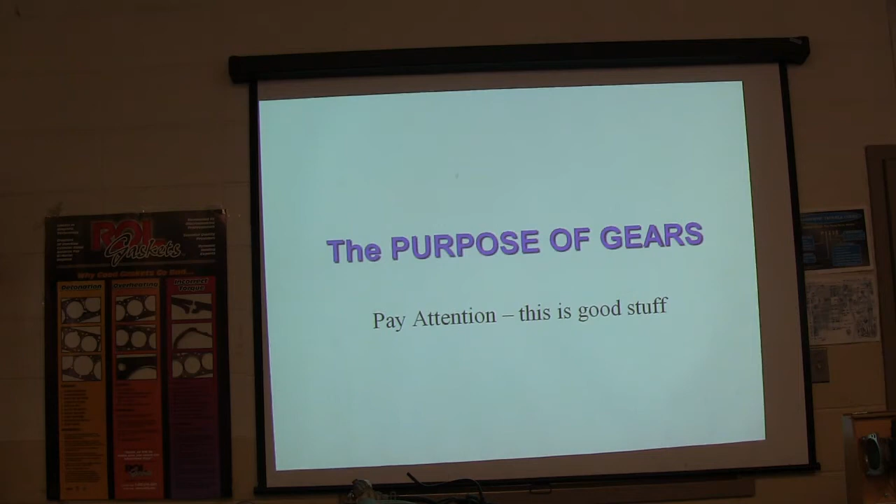This is manual transmission day, an elementary study on gears and whatnot. So you either know some of this stuff already, or you don't know much of it. But what we're going to do is show you about the purpose of gears. Now pay attention, this is good stuff.

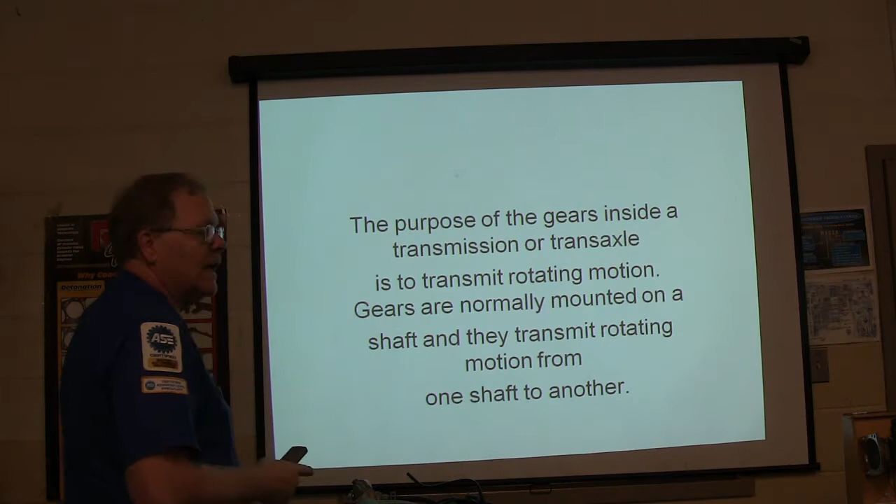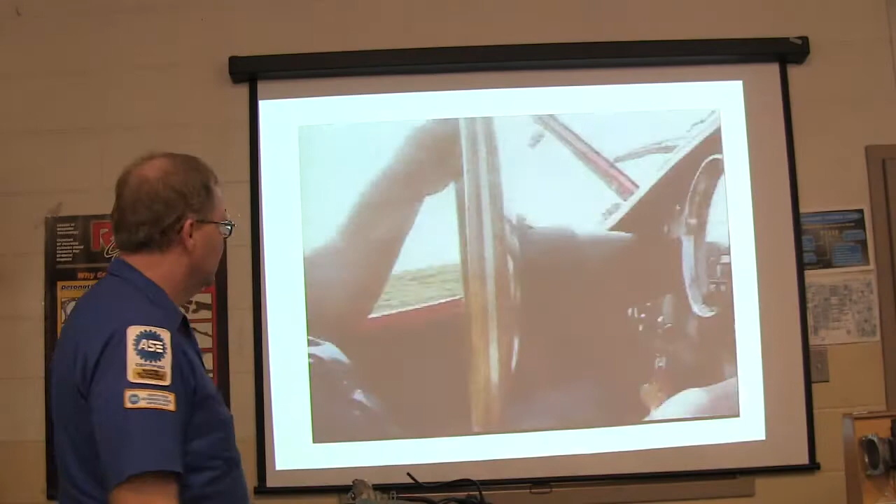This is me driving a Cobra. Believe it or not, by the time I got shifted through to third gear on that thing, I was just driving it like I would any other car. Donnie was riding with me. He goes, 'Did you know you're going over 100 miles an hour?' And I said, 'Good grief.' I didn't have any idea that thing was that overpowered.

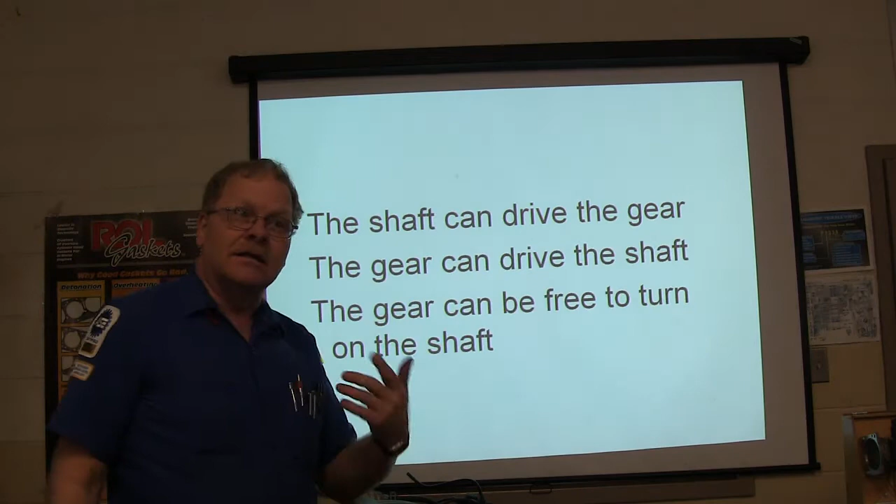The shaft can drive the gear. The gear can drive the shaft. The gear can be free to turn on the shaft. This is how these transmissions work.

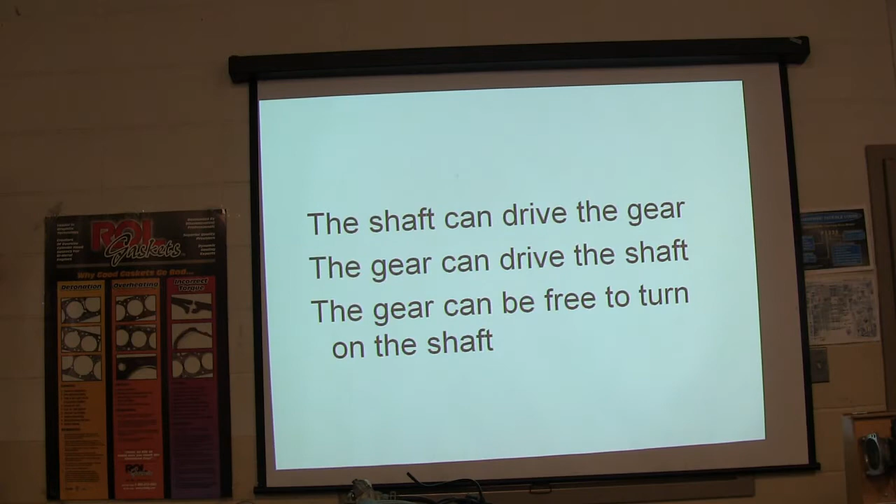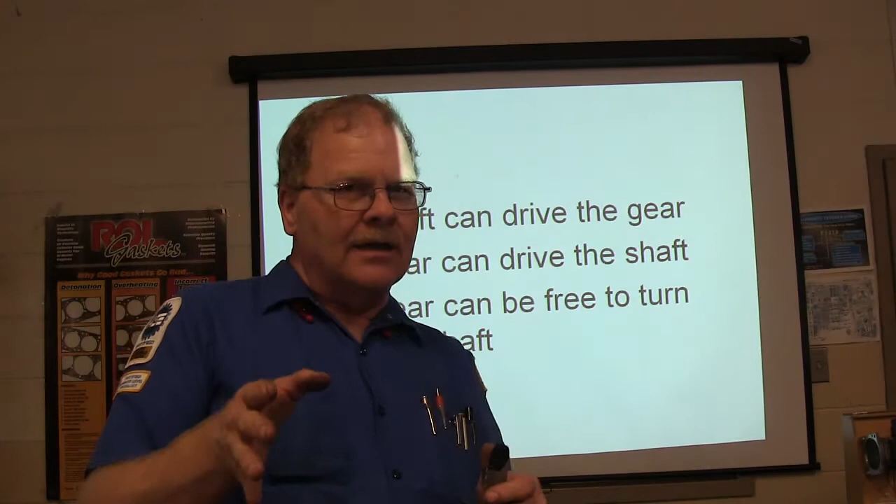Now I got one over here that you guys are going to need to know. See that one over there? We can set it up and actually show you guys how all this stuff works. Ultimately you're going to need to know that, and we don't need anybody struggling at the end of manual transmission to figure out how the power flow works. The sets of gears can be used to multiply torque and decrease speed, or increase speed and decrease torque.

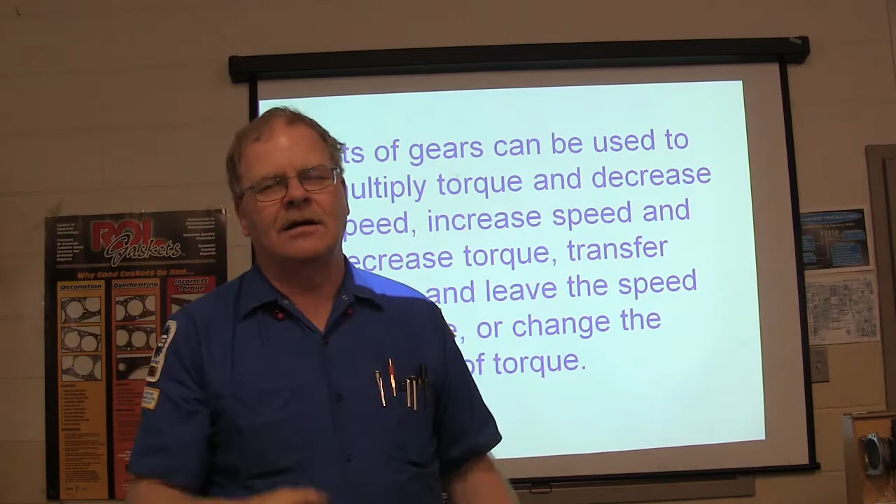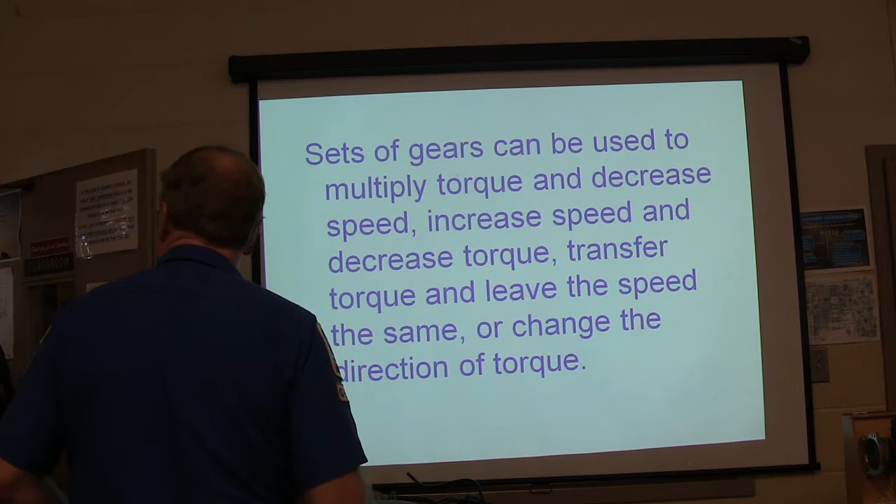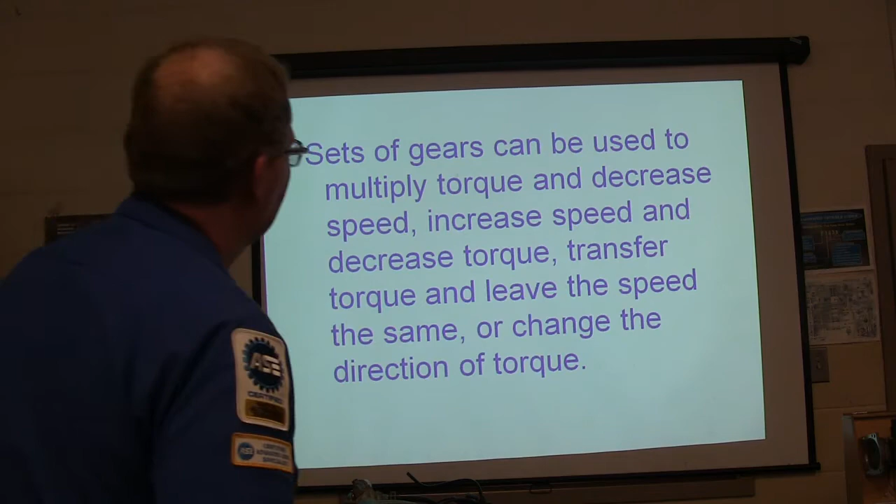Hey Richard, what did we decide about getting you an oxygen cylinder? I remember something about a cylinder and a purchase order that she faxed to them, and the one I'm swapping in for it is over there in that cage in the other shop. Is he here now? He said he didn't have a PO. Yeah, he's got a PO, she faxed him one and even sent me a picture of it. Just tell him I'll get him next week, he's basically just a steering wheel holder. Well, if you want, y'all can swap it out with us. Yeah, that's fine, we'll swap it and bring it down there, just get the boys rolling. He's got a PO but I don't have time to track it down. With him it's not productive to try to get him to find it. All right, we'll get it. He was a nice guy to come look after me on that. We got a bottle of oxygen that's empty, and another one on this thing that's full. Anyway, I don't know why I got into all that.

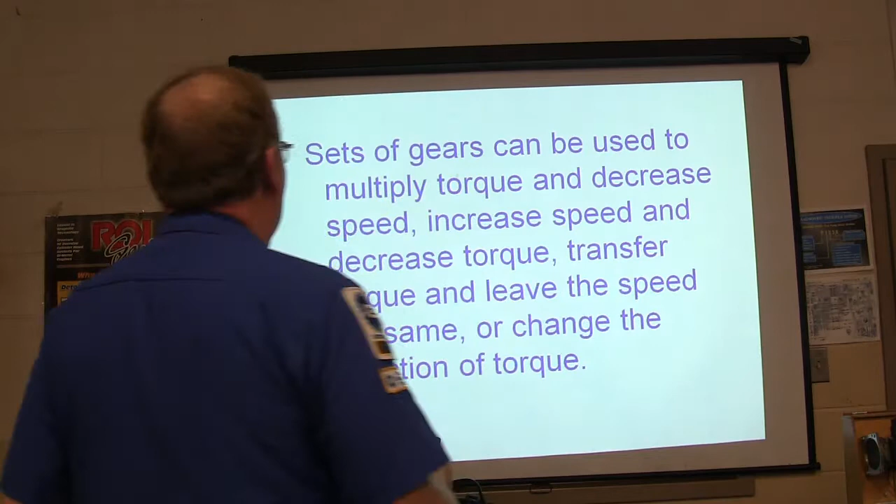But anyway, transfer torque, leave the speed the same, or change the direction of torque. So gear rotation has got to be understood when you're performing diagnosis and service, and that's the deal.

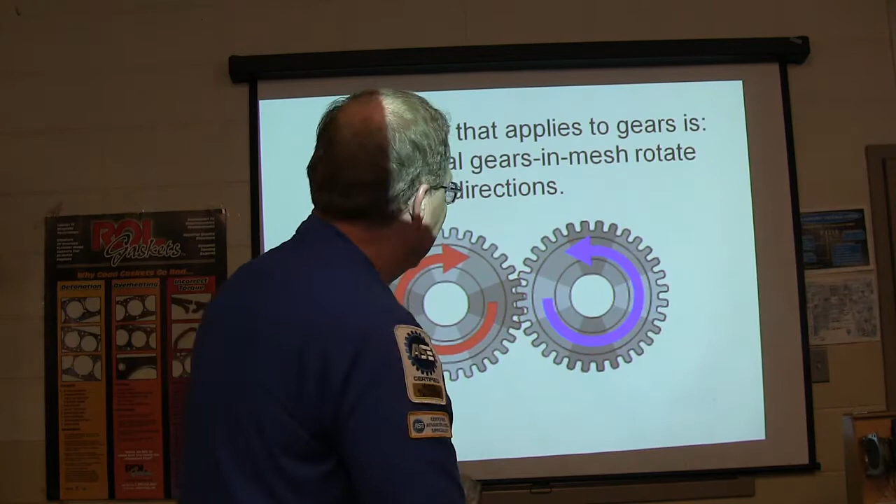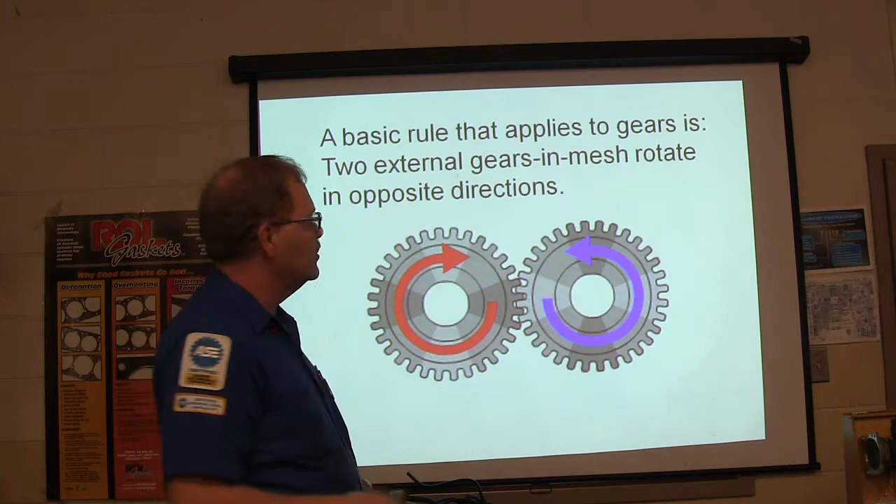Now planetary gear sets are a little bit different because you've got an inside ring gear on those. That's another story. An engine driving a gear clockwise will make any gear in mesh with it rotate counterclockwise.

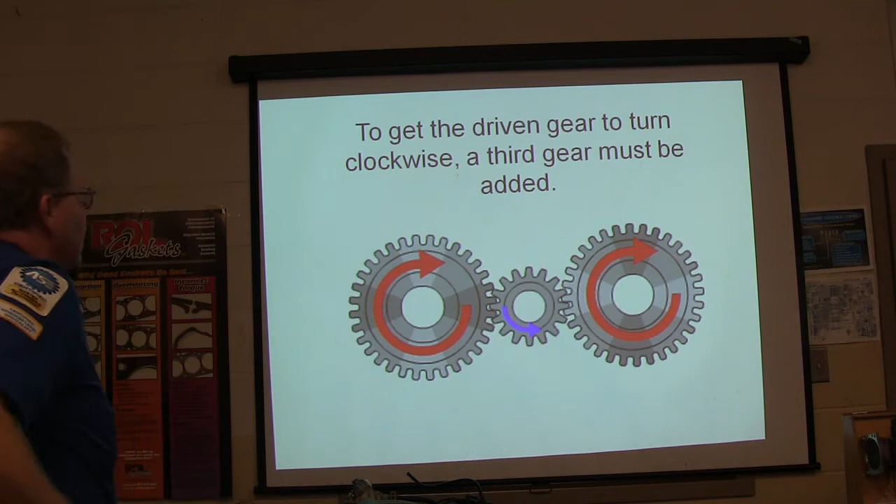But if you put a third gear in there, if you add a third gear, you're basically going to have both of your business end gears turn in the same direction. That's what happens in a manual transmission - you're basically adding a third gear. All right, now these are different kinds of gears.

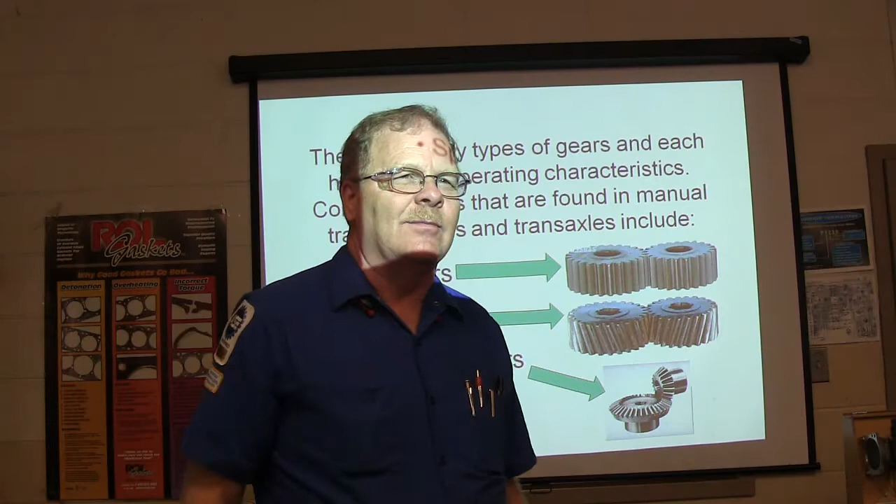Pay attention to this, it won't take us long to go through here. There's a lot of types of gears, and each one's got its own operating character. How many of you ever noticed that when you put a car in reverse and back it up, you always hear it making noise? That's because you're using a spur gear.

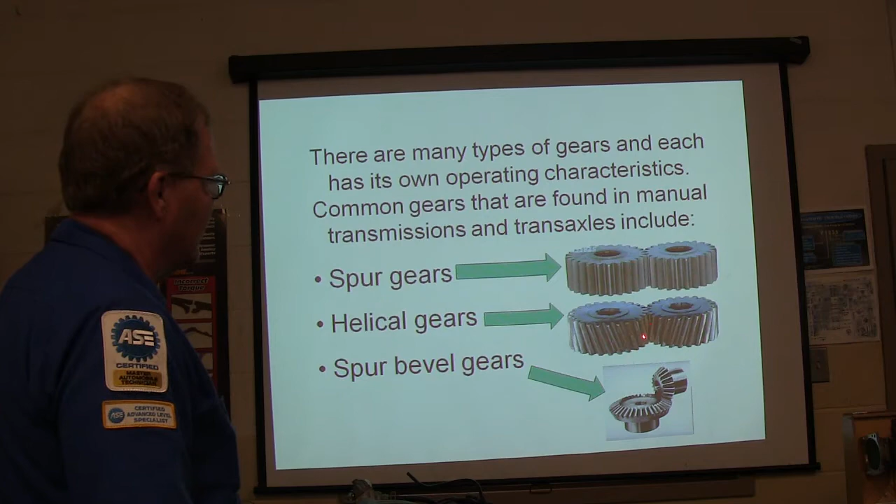We'll talk about that. Helical gears are stronger because you've got more teeth, more than one tooth in there. And these are little spur gears - another place you'll see spur bevel gears is in the differential.

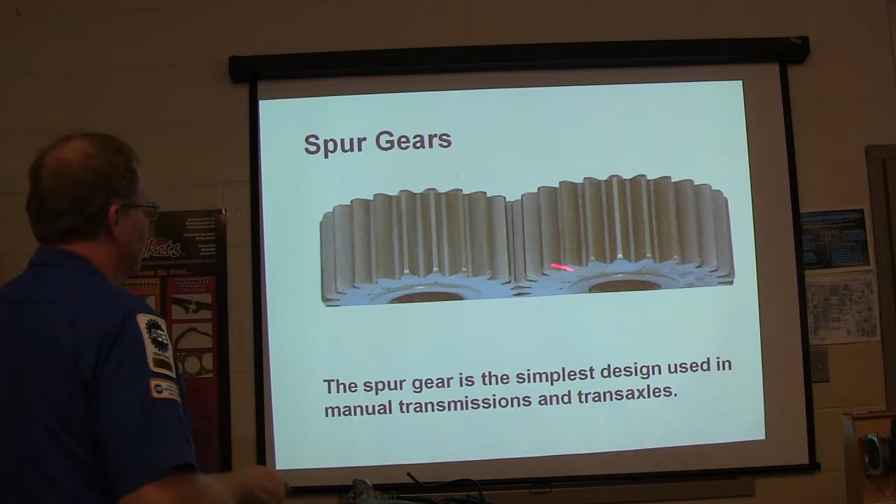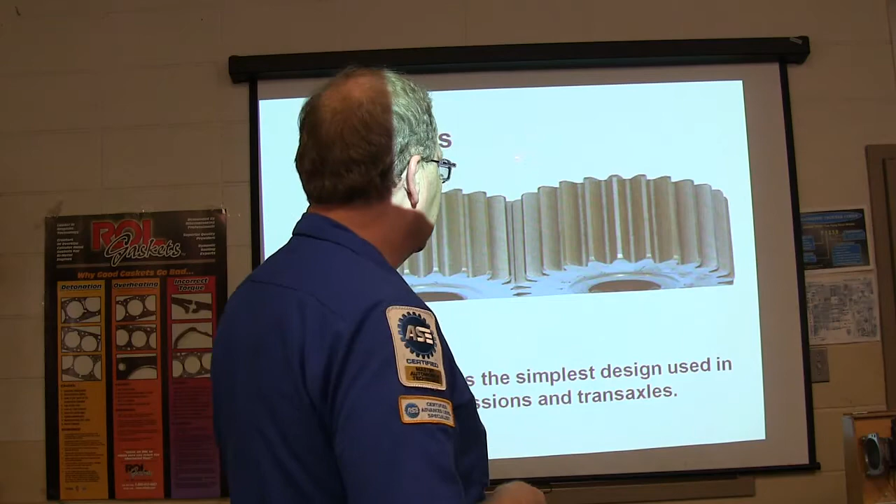All right, so the spur gear is the simplest design used in manual transmissions. The only place you see this in a manual transmission is in reverse. Now if you've got a bigger truck, you'll have spur gears in there because of the way they have to work - they have to be able to slide in and out. They don't use shift forks in a big truck, and they actually have a little plate on the side so you can hook a power takeoff to it too.

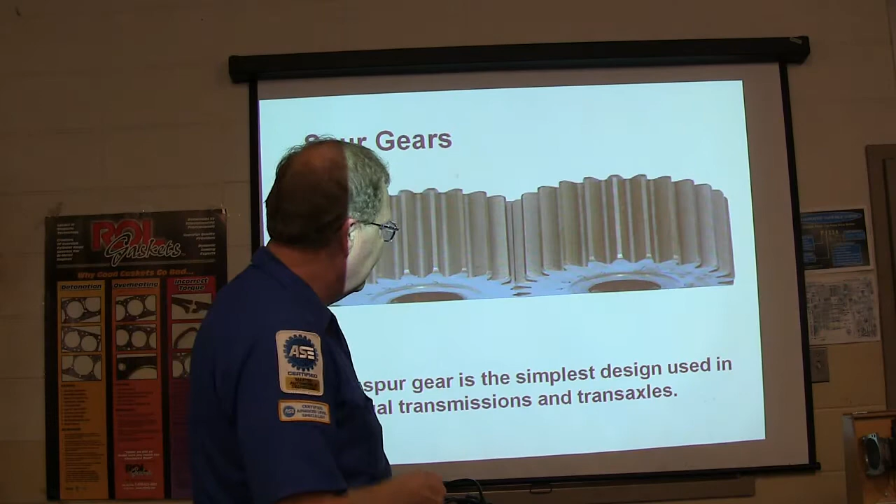And incidentally, just for future reference, when you hear the term backlash, that's actually how much space there is between the teeth of the gear. Click, click, click, click - you're going to hear that later on.

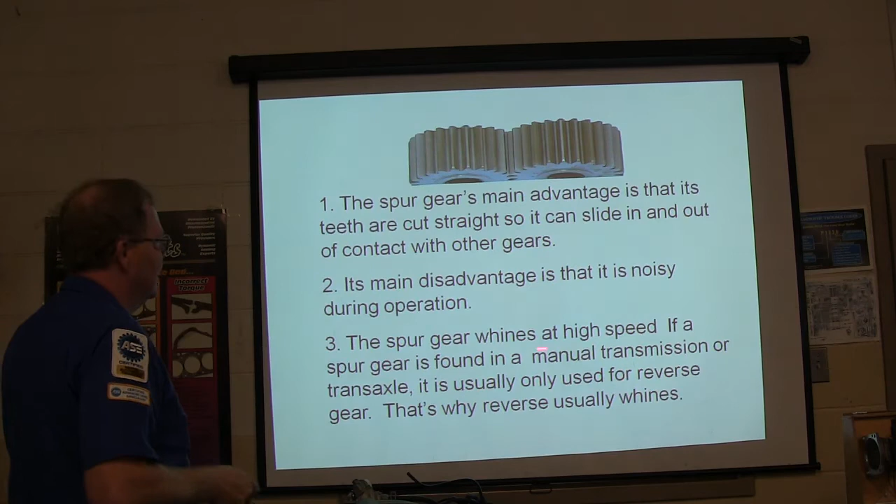All right, the advantage is its teeth are cut straight and it can slide in and out of contact. Its disadvantage is it's noisy, and it whines at a high speed if it's in a manual transmission.

One time, when I was about 13 years old, my dad had an 8N Ford tractor sitting in the yard. I would piddle around with that thing, get it started, and drive it all over the countryside - up and down the road, through the field, all that kind of stuff. Well, one day the battery was dead on it. Couldn't get it to start, and these two yo-yos that lived close by came over in their Chevy Nova and said, we'll hook this thing up to the back of the Nova and drive it up the road, and you can get it started that way.

They just figured they were going to have a good time. So I got up on that tractor, put it in one of the gears, I don't remember which one, and was holding the clutch. He took off up the road on that Nova, and he knew he was going faster than he ought to be. He had that tractor going about 45 miles an hour, and I could hear the gears in that rear end going, yang, yang, yang, yang, yang.

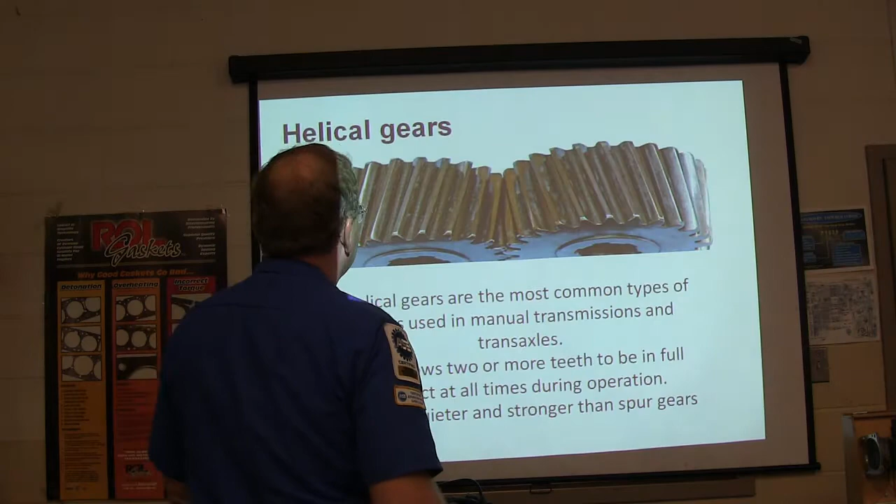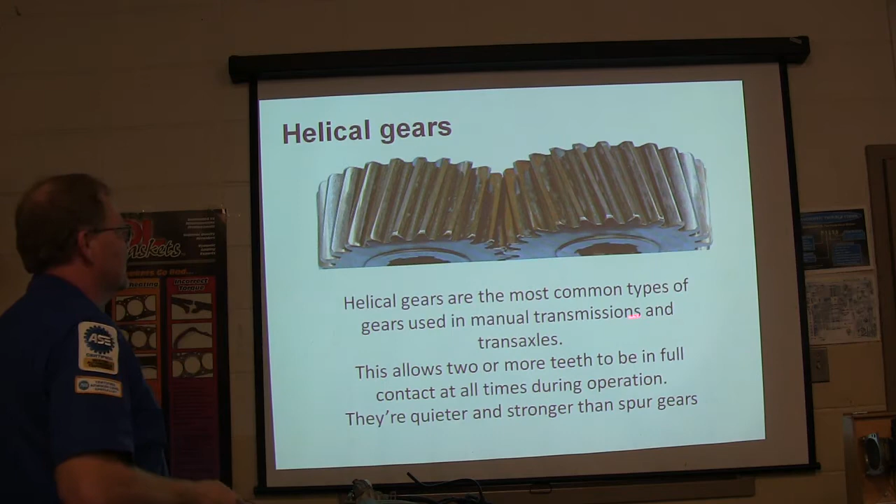That was dangerous. Helical gears are the most common kind - that's what you see on that transmission I showed you over there.

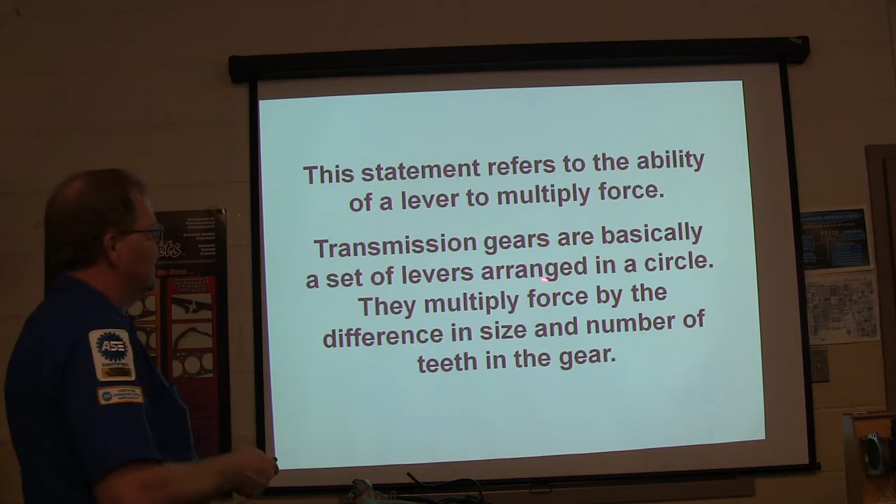All right, so gear ratios - Archimedes said, give me a lever long enough and a place to put it and I can lift the world. A lever is really something like your screwdriver - you use a lever when you're prying on something. You can multiply force with a lever. On transmission gears, think about this: there's a set of levers arranged in a circle, and they multiply force by the difference in size and number of teeth of the gear.

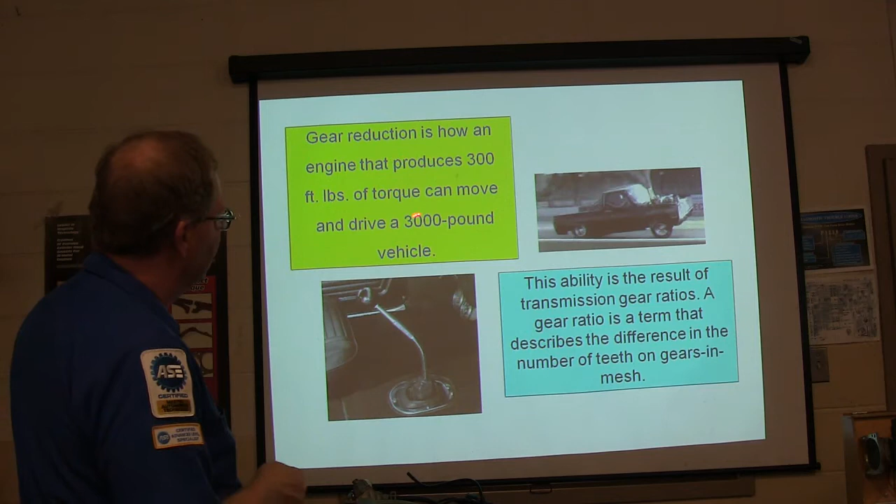Gear reduction is how an engine that produces 300 foot-pounds of torque can move a 3,000-pound car. 300 foot-pounds of torque, car weighs 3,000 pounds. That ain't really enough unless you got something in between it, right?

So you got transmission gear ratios. They're ones that are the same size or have the same number, a 1-to-1 ratio.

Let me ask you this. If I had 3 32 gears in the rear end, what would that mean? You're pretty much talking about these hot rod guys, they have 411 gears and all that. You remember them say those words? Y'all ever hear that?

Like a 410, 411. I'll talk about that again in a little bit. It's how many times the drive shaft turns compared to how many times the wheels turn. So if the drive shaft turns more often per turn of the wheels, is that going to give you more torque or less torque?

Less torque? No, think about that. If you're gonna turn it, remember when you rode a 10-speed bicycle? When you're in low gear on a 10-speed bicycle and you're pedaling, you gotta pedal to beat the band to get a little bit of speed up. You know what I'm talking about? That's what this is. Lots of turns of the drive shaft for one turn of the wheels means you got a lot of oomph back there, a lot of torque available at the rear end.

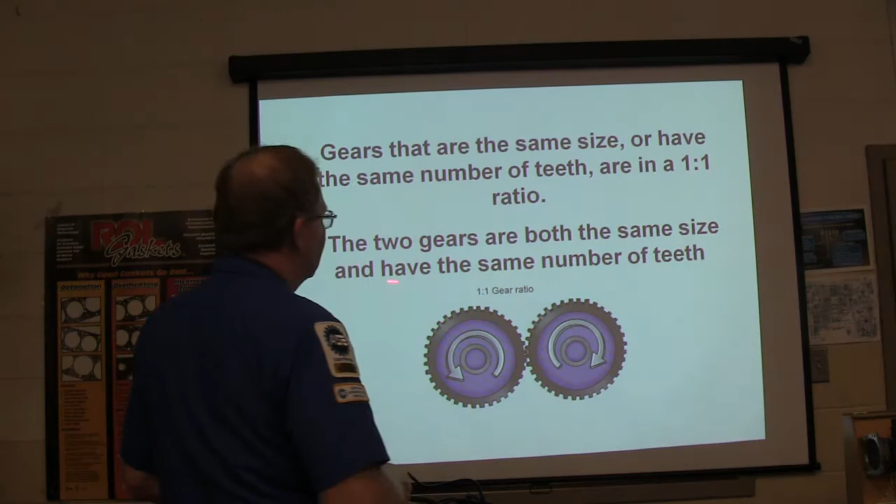The two gears are both the same size, they have the same number of teeth. It's a 1-to-1 gear ratio, see? Same number of teeth. So each time the driving gear turns one way, the other gear turns the opposite way. The only difference between them is they're rotating opposite directions. A 1-to-1 gear is direct drive, because the driving gear rotates one time for each rotation of the driven gear.

Gear ratios are usually written with a colon. See that? 1:1. That means 1-to-1.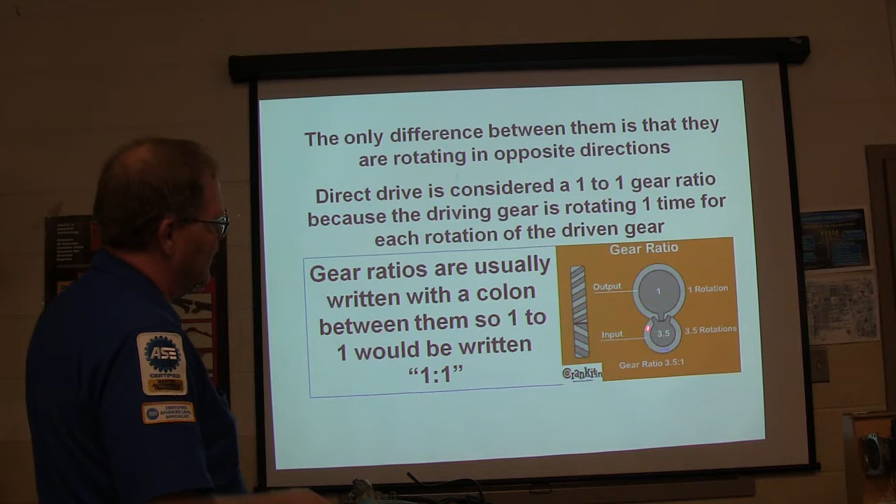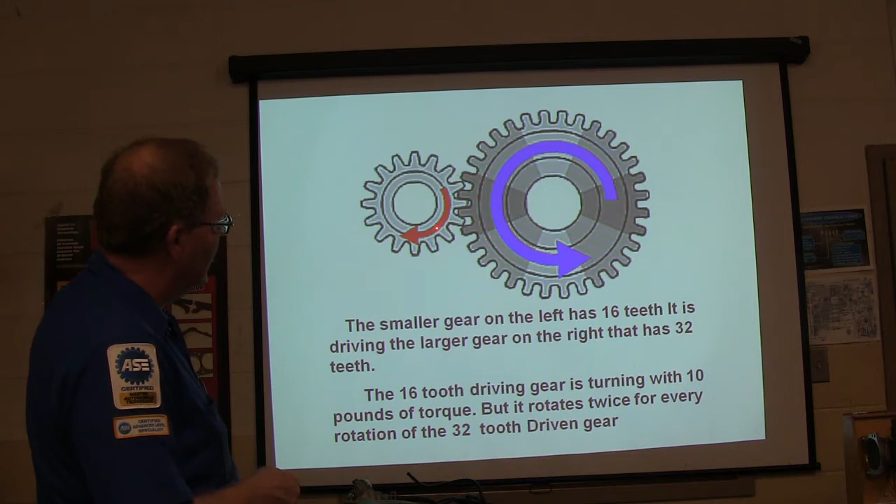Now this one right here is 3.5-to-1. They didn't draw all the teeth, but they're basically just trying to show you that right there. The smaller gear on the left has 16 teeth, and it's driving a big gear on the right that has 32 teeth. The 16-tooth gear is turning with 10 pounds of torque, but it rotates twice for every rotation of the 32-tooth driven gear. So you're multiplying the torque by putting a little gear driving a big gear.

That's when you're in your lower gears. But when you get into your higher gears, you get closer to 1-to-1. When you got your bicycle in the highest gear, how you turn it slow and you're going on down the road, that's basically what you're thinking about right there.

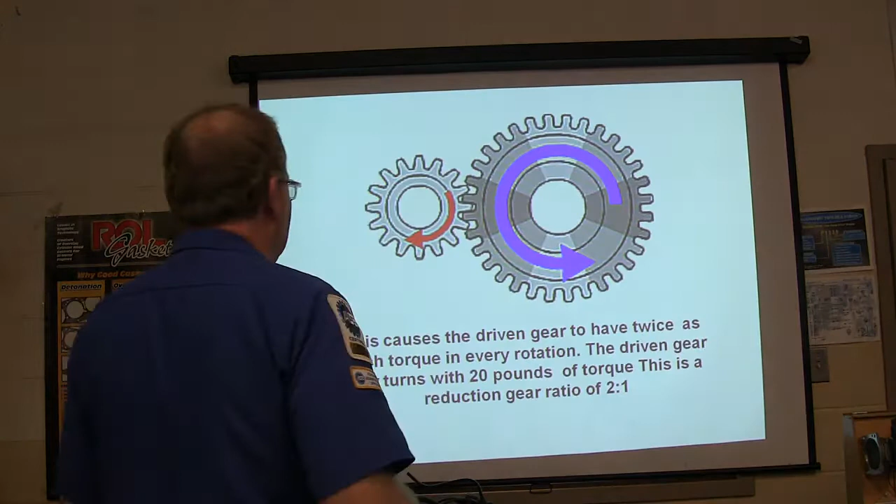Incidentally, if you got two gears that are driven by a chain, you don't have this backwards business going on. They're basically both going the same way because the chain's always carrying it around. That causes the driven gear to have twice as much torque, so you've multiplied your torque. If you got 10 pounds of torque here, now you got 20 pounds of torque here, but it only turns half as fast.

You remember on brakes, I don't know if you guys got into Pascal's law going to your hydraulics stuff, but when you've got a little piston that's pushing a big piston, if it's half as big as the big piston, it only moves half as far, but with twice as much force as you're putting on it. That's the same kind of deal.

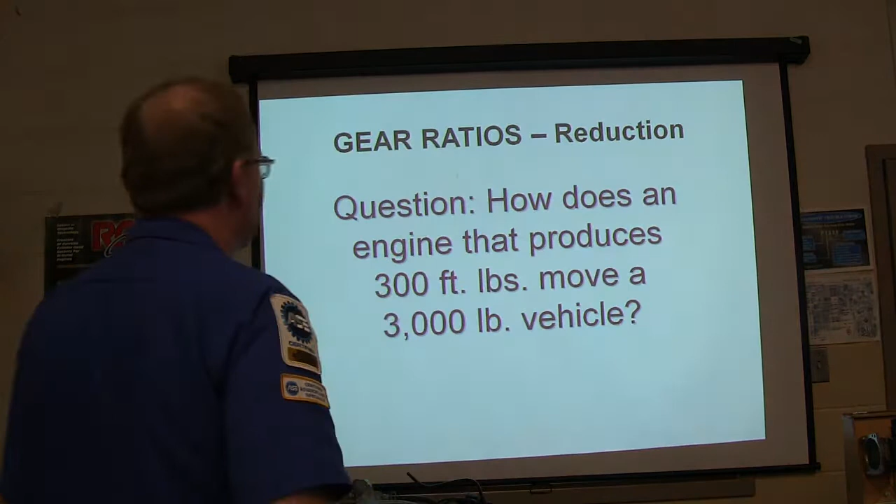How does an engine that produces 300 pounds move a 3,000 pound vehicle? Now you got a transmission, you got the drive shaft, you got the differential. Now you got a gear ratio here, and you got a gear ratio here. So basically, you're going to have to multiply this. If this right here is a gear ratio of 4 to 1, and this is 3 to 1, you multiply that, you get how much torque is actually being delivered right here.

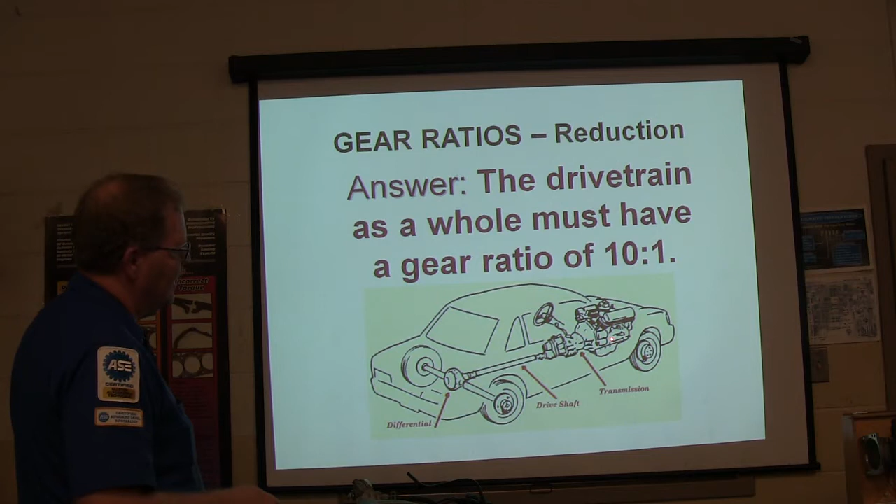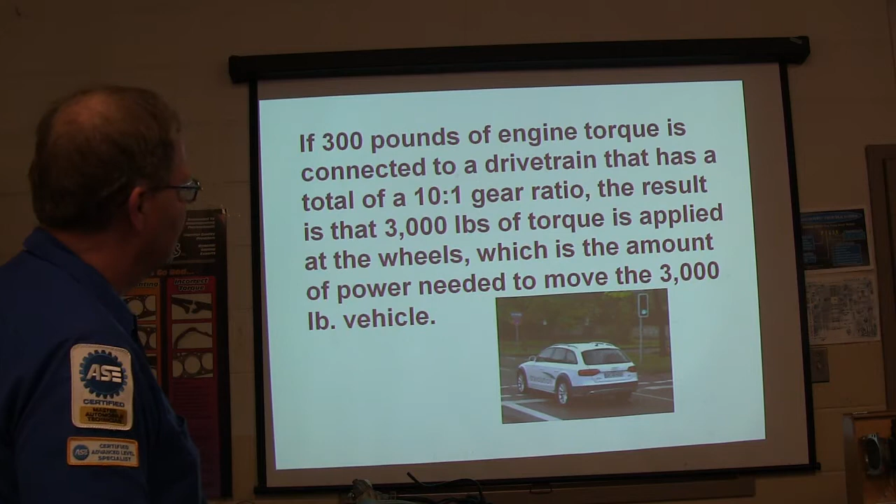Now, there's 1 to 1, there's 2 to 1. You get those gears in your mind, you won't forget that. There's a drawback though. The driving gear's got to turn a lot more times. You notice how the starter gear is really little, and the flywheel gear is really big.

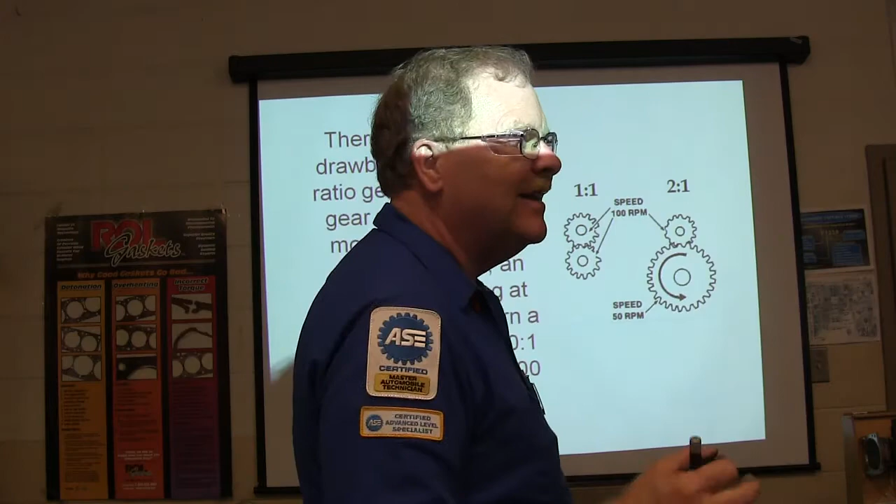The starter's got to spin really, really fast to start the motor fast enough. Usually the gear ratio on average is about 14 to 1. The starter gear is turning about 14 times for every one time the flywheel turns.

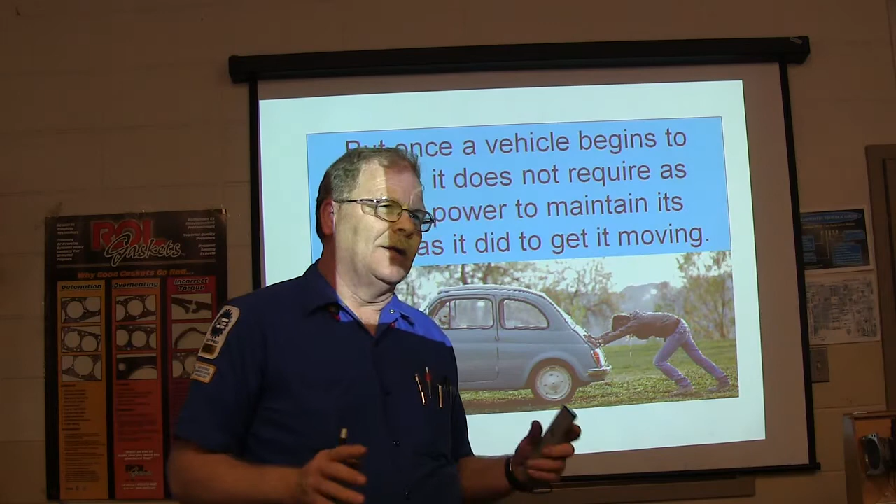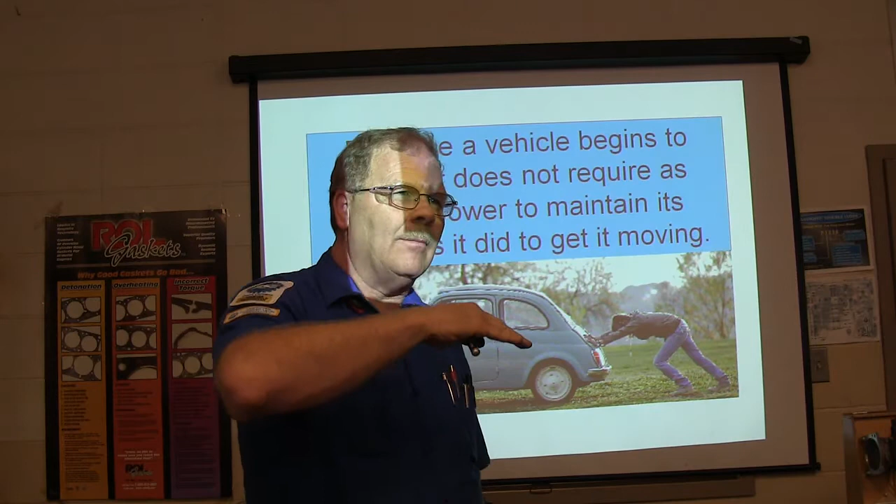Now, whenever you push a car, have you ever pushed one? When you first start it moving, it's really hard to get it moving. Once you get it going, you can keep it going pretty easy. That's the same way with an electrical load too. It takes more amps to get the current started flowing than it does to keep it flowing.

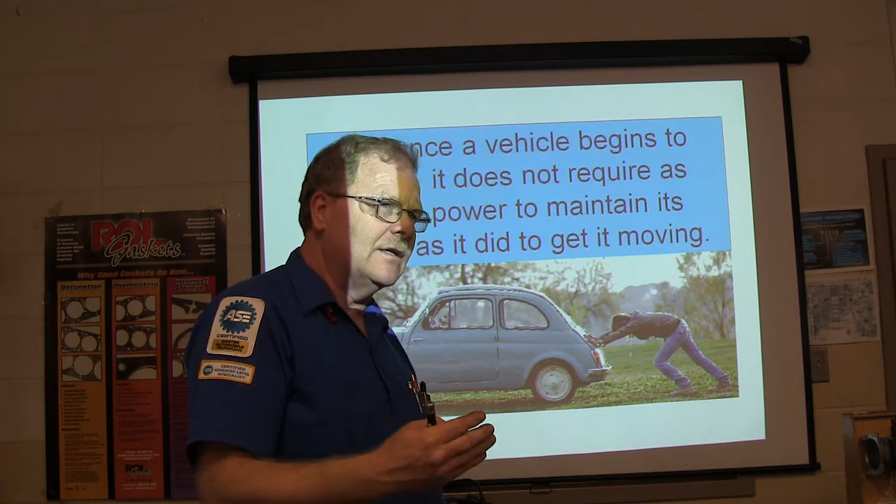After you get it moving, you can shift into another gear and get more speed, but you don't need as much torque because you're already moving. But why is it that it takes more to get it going than it does to keep it going?

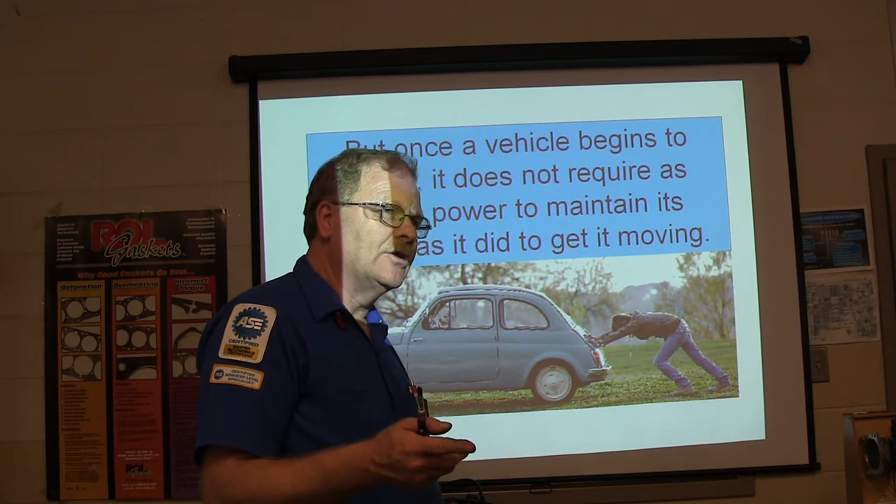What's the principle you learned about in school? Think about it. Inertia, that's what I'm talking about. If something's sitting still, it wants to stay still. If it's moving, it wants to stay moving, unless it's affected by an outside force.

Here's an example of the gear ratios. Reverse is 3.4 to 1, first gear is 3.97 to 1. Which of these is a higher ratio? First gear is a higher ratio than reverse. Second gear is 2.34 to 1, third gear is 1.46, fourth gear is 1 to 1, and fifth gear, which is overdrive, is 0.79 to 1.

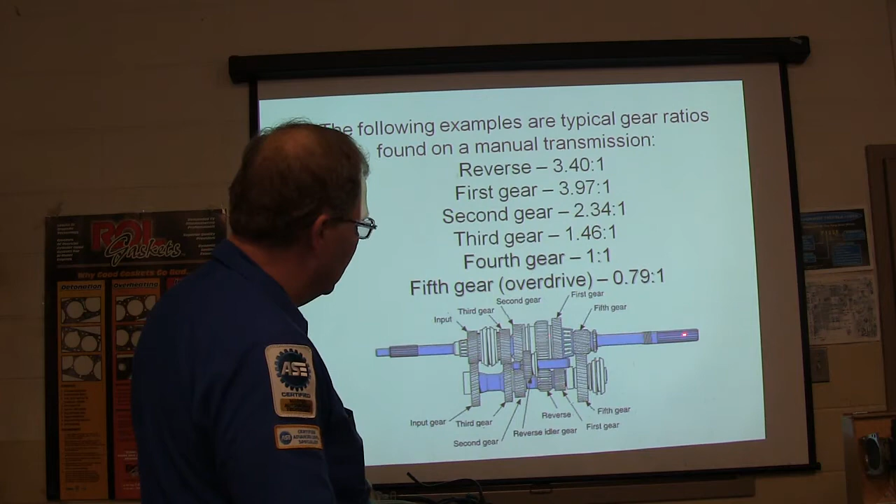Think about that, because that means the engine, which goes to the drive shaft, is actually turning slower than the drive shaft when you're in overdrive. That's the way it is in an automatic transmission too, because your torque converter clutch locks up in the front.

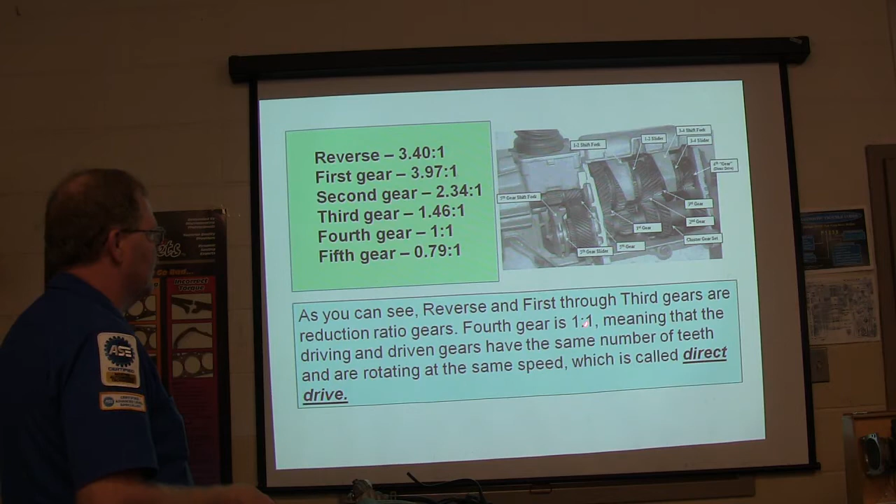Reverse and first through third gears are reduction ratio gears. Fourth gear is 1 to 1, which means every turn coming in the front is a turn coming out the back, and that's direct drive. So overdrive - anytime the driving gear is rotating slower than the driven gear, it's an overdrive gear ratio.

I heard a story when I was at one of my schools up there about this guy that bought a '67 Chevelle with a 396 in it. Back in the olden days, you could do crazy stuff on your car out there on the road and you wouldn't get in all that much trouble for it. But he was running all over town with that new car, outrunning the cops and just making it up and down the roads out there somewhere in North Alabama.

They couldn't figure out what to do to stop that guy, because they didn't want to put up a roadblock that he might run into and crash and kill somebody. They just tried to get him to pull over, but they couldn't catch him, he's too fast. The guy telling this story was the one doing this hogwash back in the 60s. He said this old sheriff came out with a '63 Chevy Biscayne that had an overdrive transmission on it.

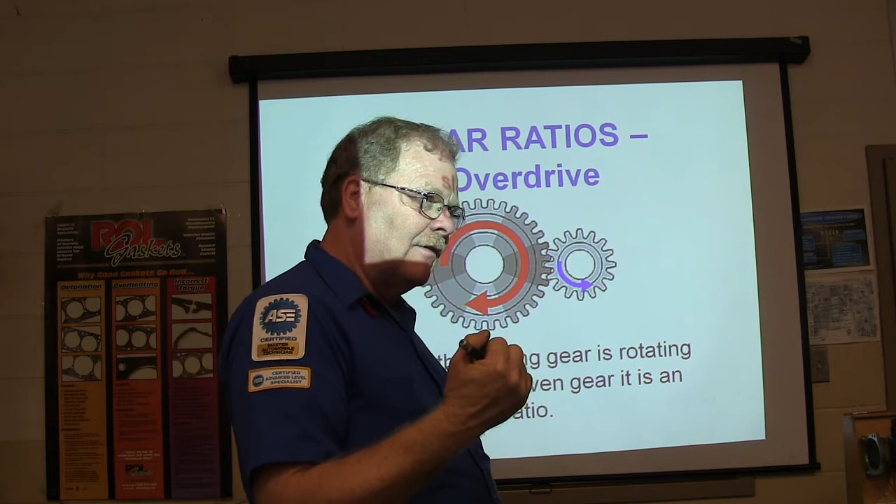Some of those old Chevys had a little solenoid on the side and the planetary gear set in back. You'd put it in first gear, give it the gas, let off, and you'd get a second gear - all you had to do was let off and you'd get another gear. Then you'd go to second gear and it would drop out of overdrive. So you had an overdrive ratio for each gear, basically giving you 6 different speeds.

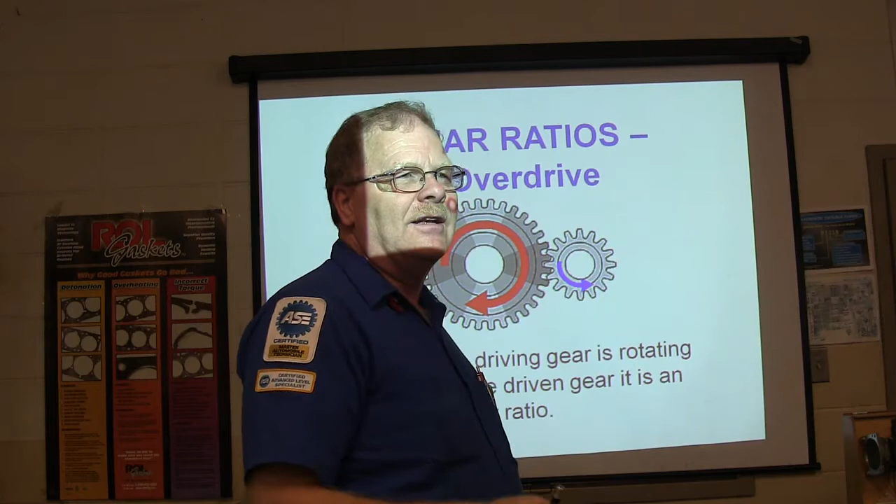So this guy headed down a long hill into a valley, down a long straight road. He was going downhill and hit that thing, not knowing how fast he was going - he'd already gone around there and bumped a post on the other side. The cop in that '63 Biscayne came up behind him. I looked over at that guy, and when he went by me, I saw him reach up to pull it down into high gear. He said he had 2 gears left to go when he passed him. That took all the fun out of his ride - of course they locked him up.

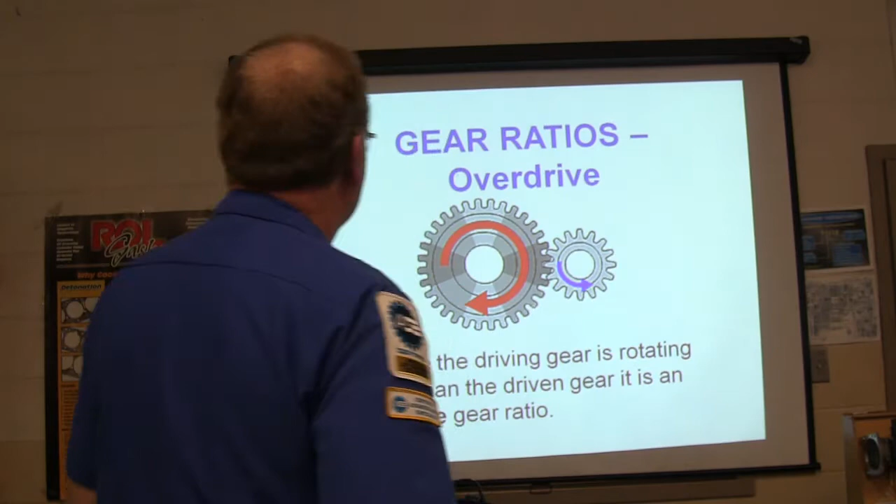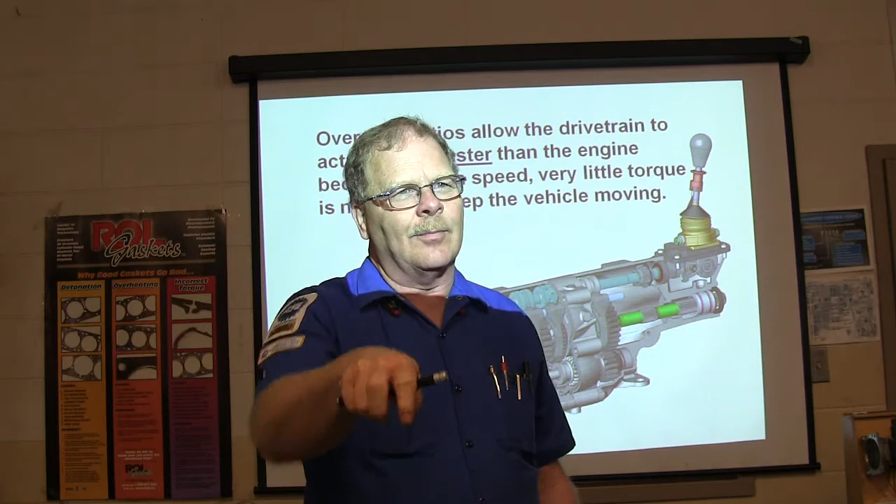Okay, so that was overdrive. Back in the olden days, in the 60s, a lot of vehicles had overdrive. If you didn't want to use overdrive, because you were pulling a trailer or something, you'd pull this thing out on the dash - it looked kind of like a park brake release and said overdrive on it. Pull it out and it wouldn't work. The overdrive ratio lets the drivetrain turn faster than the engine, because at high speed, less torque is needed to keep the vehicle moving.

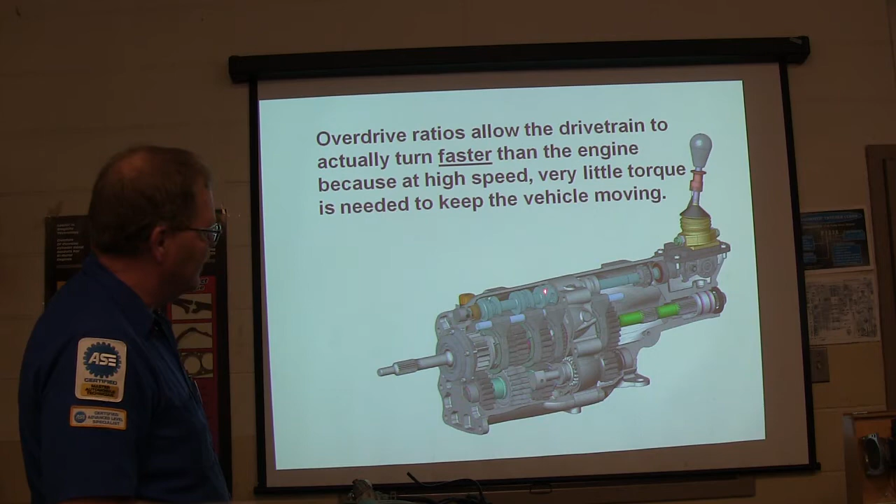Now what's peculiar about this transmission right here? Notice it has shift forks, but look how they operate - they've got funky little channels here. Now I'll tell you this, something you need to remember: some of your newer transmissions, there's talk of getting away from automatic transmissions and clutches, and they're actually building transmissions in some of the smaller Ford cars that are built like this on the inside.

They've got 2 input shafts and 2 clutch discs, and they shift automatically. You just drive off - they've got gears inside them just like this, and they shift using a similar mechanism to this one. So you don't actually have to do this yourself, you just put it in gear and go.

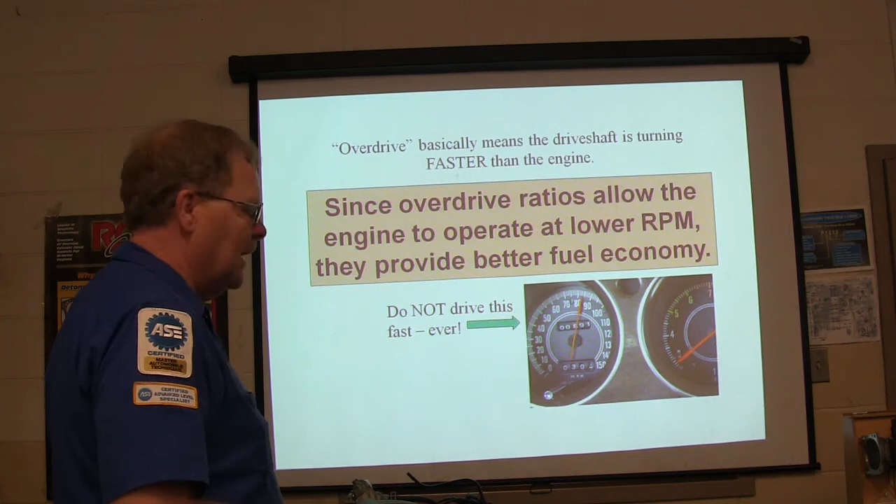Overdrive means the drive shaft runs faster than the engine, and it gives you better fuel economy. That's why a Crown Victoria, like that blue one you were working on the other day, will get 26-28 miles to the gallon on the highway - because they've got a high-speed rear end under there, and that overdrive ratio in the transmission. They started coming out in 1979 with that one, and they were getting gas mileage up in the 20s even on those cars back in '79.

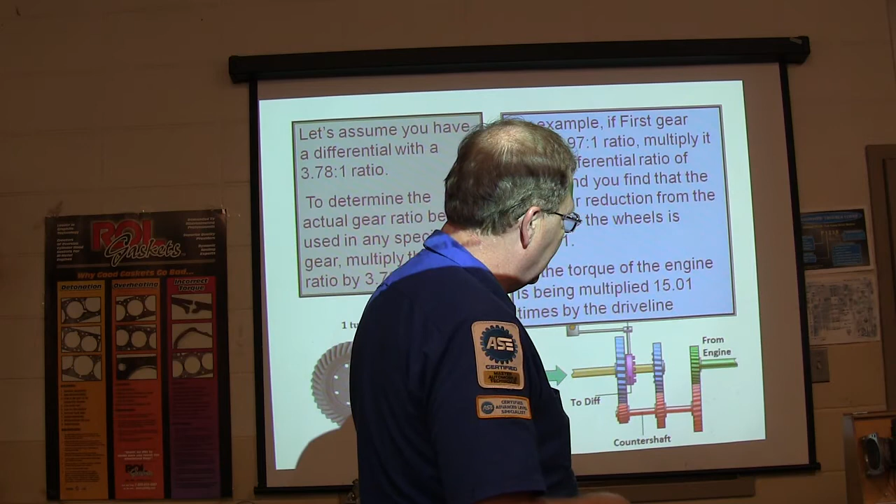But notice this - this is the early beginnings of that. This shaft here coming in from the engine is always turning that counter shaft, even in neutral. I'll show you a diagram of that in another presentation later. This collar here, hooked to the shifter you can't see because it's under the words, is actually causing this shaft to be locked to that gear. So this is driving that counter shaft, and there's your 3rd gear down there in between.

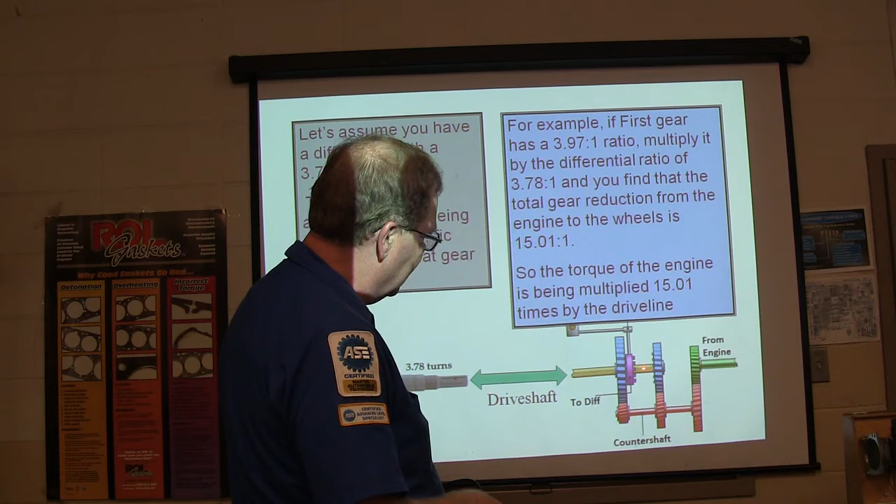See, you've got a gear here and a gear here and a gear here and a gear here. So because this one's turning that one, imagine these all being the same gear - you're turning this one in the same direction as that one because you've got this 3rd gear in there. And the drive shaft is driving that. So if you've got 1st gear at 3.97 to 1, right here, 3.97 turns of this gear turns this gear 1 turn. And you've got a differential gear ratio of 3.78.

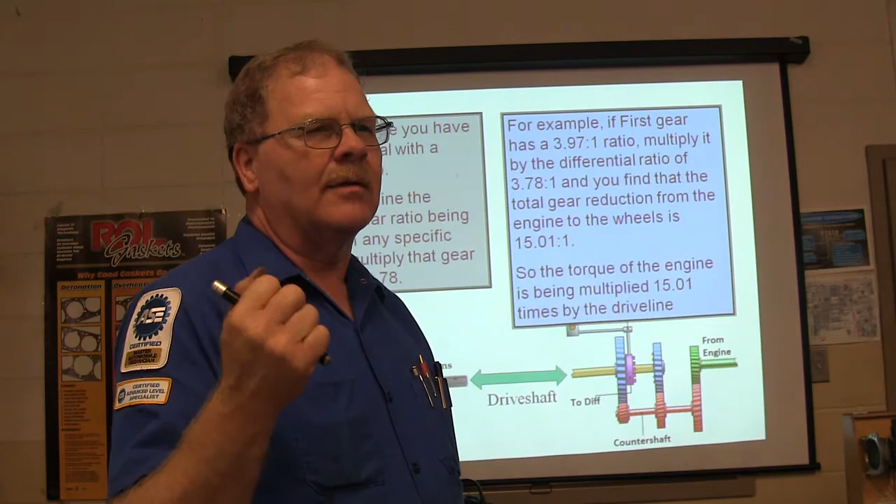You multiply that, and you find the total gear reduction from the engine to the wheels is 15 to 1 on that one - pretty strong, isn't it? So the torque of the engine is being multiplied by 15 times by the driveline. If you've got 200 horsepower, like that Crown Vic I was talking about, it's only got about 210 horsepower. But it goes really strong whenever you take off, in spite of all that.

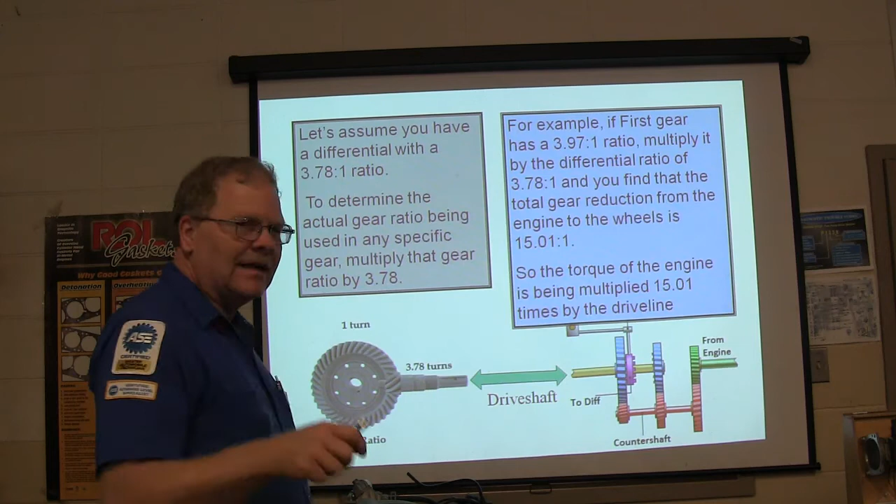But anyway, that's how that works. Has anybody got anything you don't understand about this? Because I probably ought to be giving you a written test, right? Mm-hmm. This is pretty straightforward. You getting it? Mm-hmm. All right.

All right, now what I'm going to do, just very briefly - let me find somewhere to put that, and then I'm going to get this out for just a second here.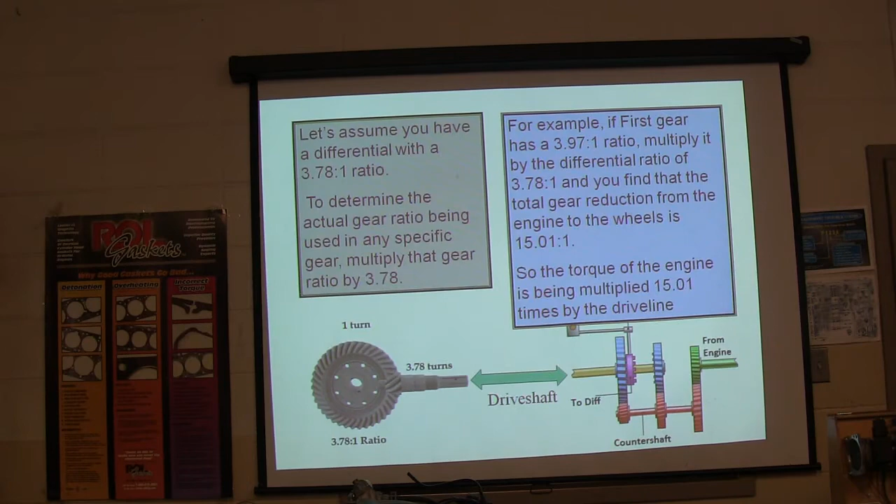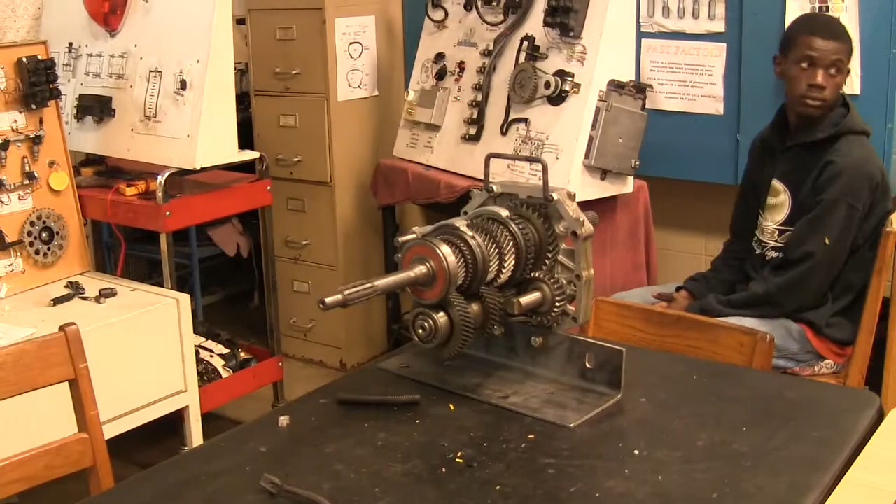I put this on a steel plate. Wasn't it on a steel plate last semester? No, I was trying to make it hard on you, so I didn't put it on a steel plate this semester. All right, I guess I'm a cowboy. Second-rate amateurs, that's what it is.

All right, you see that? Now I'm gonna give you guys a little rundown on this. It won't take me just a minute to show you. I'm not gonna go into huge detail, but I'm gonna give you a little something to chew on here. Pay attention, this will be your final.

Oh, they'll have a harder final than you did. Well, okay, I'm not giving any answers. Just pay attention.

Well, see this right here? You see the input shaft turning? All right, you see that, where you can see this now. You see this, this is the counter shaft down here. So this right back here is where the shifter connects, and this actually moves your shift forks. There's a shift fork back here, there's a shift fork right here, and a shift fork right here. This came out of a 2000 Jeep Wrangler.

Now your input shaft, your clutch goes on here. So whenever you mash your clutch, you're releasing this from the engine and letting it go. And this bearing right here - I'll probably say this again - if you ever hear anybody selling a manual transmission like this say it's really quiet in fourth gear but it whines to beat the band in every other gear but fourth, that bearing right there will be where your trouble is.

Because in fourth gear, it's a straight lockup all the way through, and you don't have any side load on that gear. But even when you're in neutral, see, the drive shaft ain't turning. You got that? Now this thing right here is a little bit annoying, and I usually have to bump it.

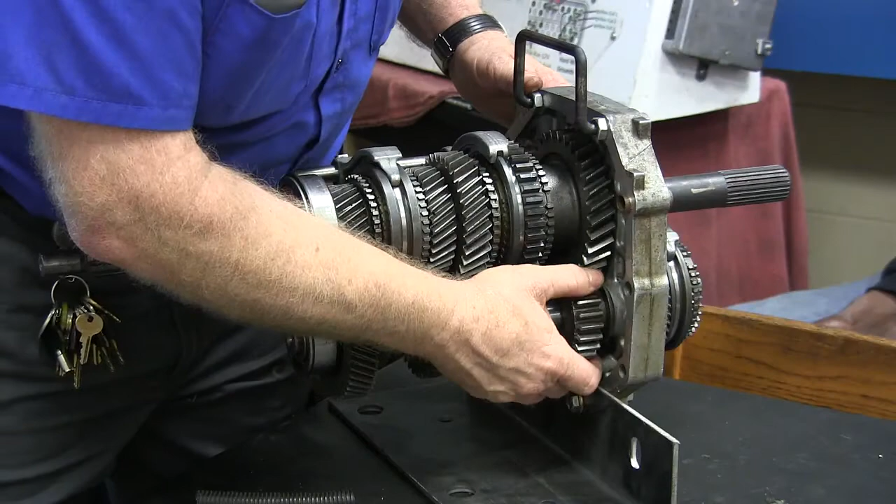Have you ever seen that before? Reverse, you turn it one way, and the output - the input's turning opposite direction. Now reverse is right here. You're actually in the fourth gear relative to that. See? See how that works? That's reverse.

And the outside of this shift collar is used for a gear, and this is a spur gear. You see the spur gear right here? That's why it's noisy when you're backing up. Now I'll give you some more information about this as we move on, but anyway, that gives you a little bit of information about that.

Yeah, that's a cool thing. Now if you happen to be fooling with this, don't bump this too far forward, or you'll have to fool with putting those little detents back in there like Hot Shot did over there, which was a sort of second-rate amateurish thing he did, but it's okay. We got it. You'll notice I put a handle on this and put it on this steel plate, so it would be able to stand up, and that's a whole lot better than it was.

The clutch disc - you probably ought to put the transaxle on a plate too. Huh? You put the transaxle on a plate? No, but I'll figure out a way to do that later.

Anyway, there's where the clutch goes, right there on that. All right, now is that making anything any clearer? You learned something from that? That look pretty good? All right.